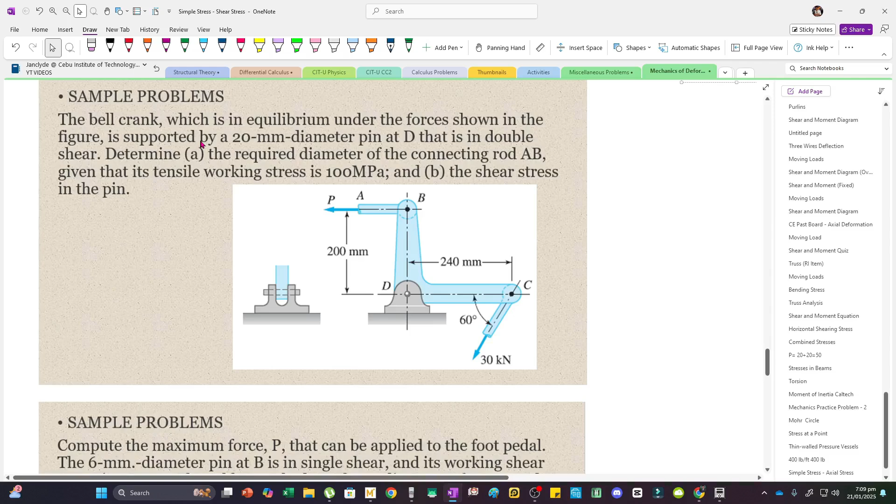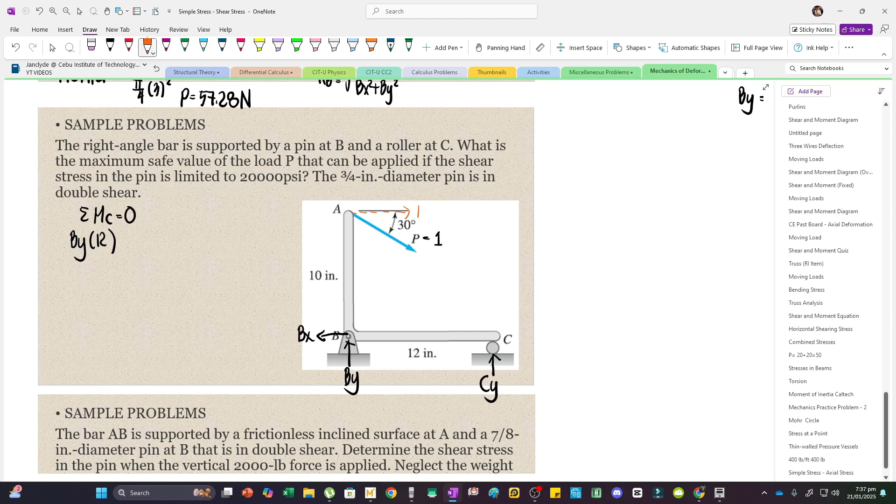Tapos ito naman, meron siyang components, horizontal saka vertical. So yung horizontal component niya is going to the right. This is 1 cosine 30, with respect to the horizontal kasi yan. And then, yung downward component naman is 1 sine 30. Now, magcause yan ng rotation about C, which is counterclockwise. So, minus 1 sine 30, multiplied by 12 din.

Tapos, 1 cosine 30, it will cause a clockwise rotation about point C. So, plus 1 cosine 30, then perpendicular distance is 10 inches. Equate to 0, masasolve na natin yung By. So, By is 1 sine 30 multiplied by 12, then minus cosine 30 times 10, divided by 12. So, negative 0.221 pala, or 0.222 na lang. And then this is in terms of P, kasi tinreat natin yan as 1.

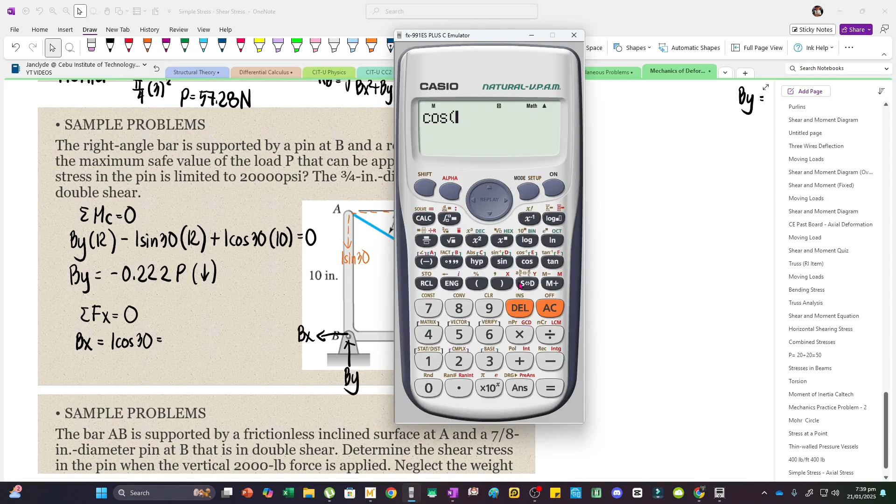So, ito yung By, and then we can solve Bx by summing up forces horizontal. Now, negative yan, ibig sabihin yung By must be acting downward. Ito yung actual direction. Summing up forces along X, Bx is to the left, ito to the right. So, equate na lang natin agad. This is 1 cosine 30, which is 0.866, in terms of P din. And then our direction is to the left. Tama yung assumption.

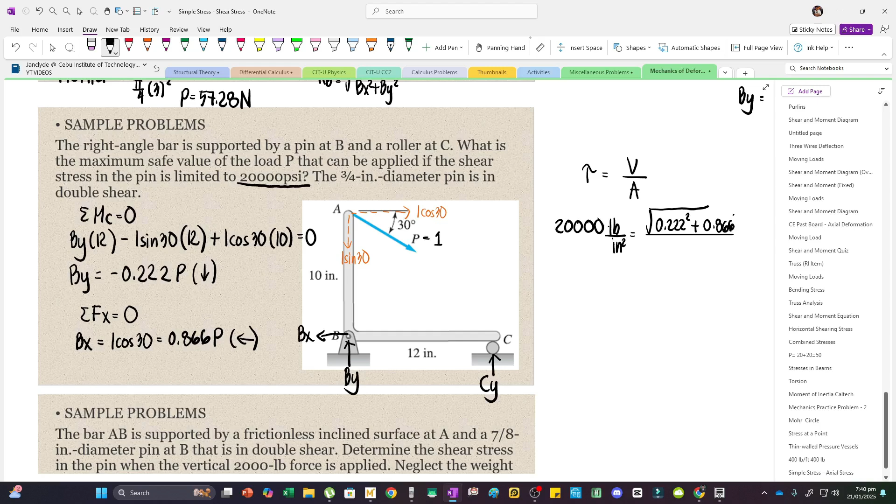So, ito yung shear stress, 20,000. Shear stress equals shear force divided by the area, pounds per square inch. Yung resultant natin is square root of 0.222 squared plus 0.866 squared, then multiply P right here. Then divide by the area. Naka-double shear, so multiply by 2. 2 times pi over 4, then our diameter is 3 over 4, or 0.75, tapos naka-square.

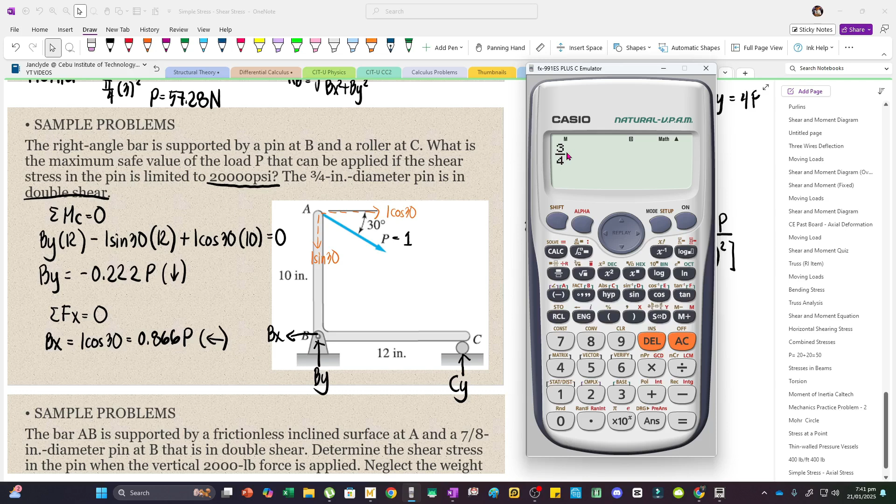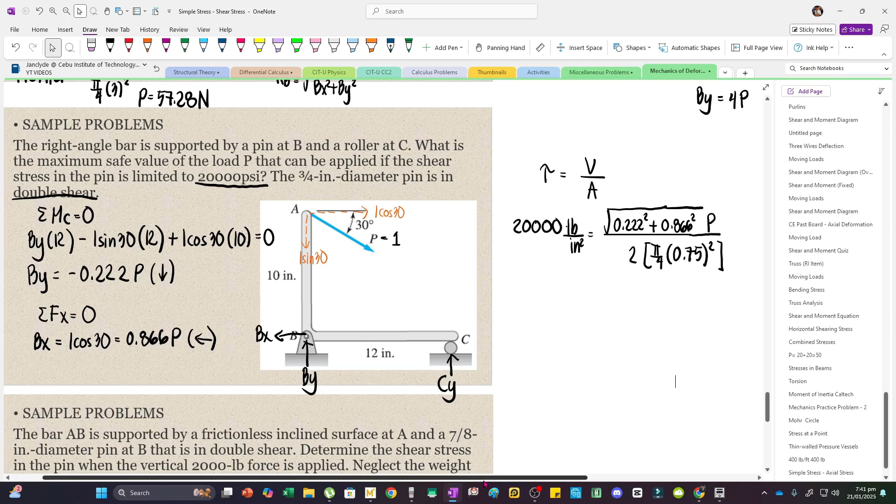Bakit 0.75 instead of 3 over 4? Mas madali kasi i-type. Kapag 0.75, we have 3 keystrokes: decimal point, then 75, hindi na kailangan yung 0. Paano naman kapag 3 over 4? Input natin 3, tapos ito, then 4, but you will have to press this one para maka-arrive ka dito. So, mas marami yung keystrokes. Kapag kinompound mo yan, makakasave ka talaga ng oras. But hindi pa naman yan necessary sa college level. Input na lang natin.

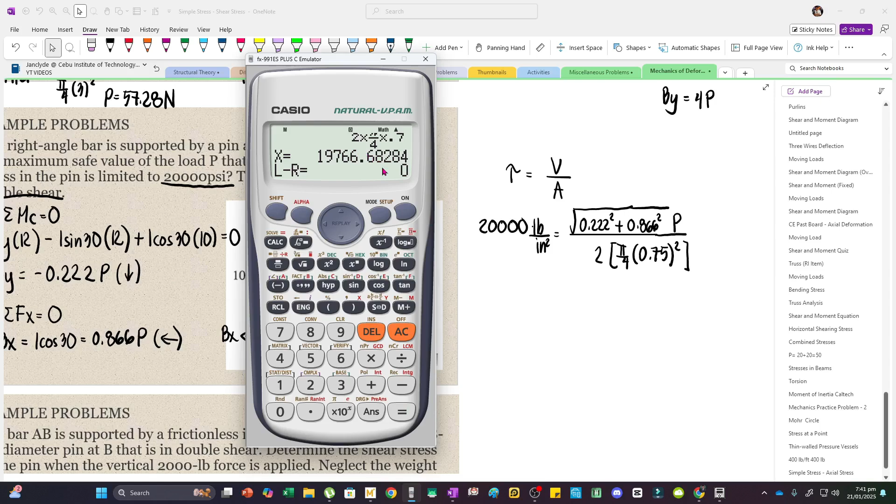So, 0.222 squared, plus 0.866 squared, multiplied by P, divided by 2 times pi over 4, multiplied by 0.75 squared. Solving P, this is 19766.68, tapos naka-pounds.